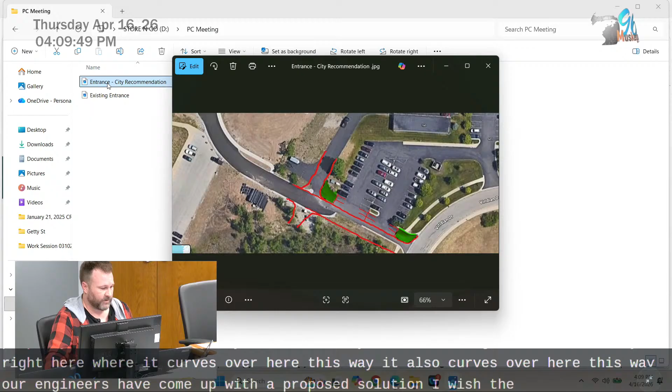Our engineers came up with a proposed solution, which the developer can speak on. We talked a little before the meeting — this was just a quick sketch showing how it could function better. They agreed to remove the parking spaces in this area, since they'd be dangerous for ingress and egress with 90-degree parking there. Since they're removing that, we could shift this road down to the south and bring these curbs down here as well. The parking lot owned by Parmenter would actually gain several parking spaces.

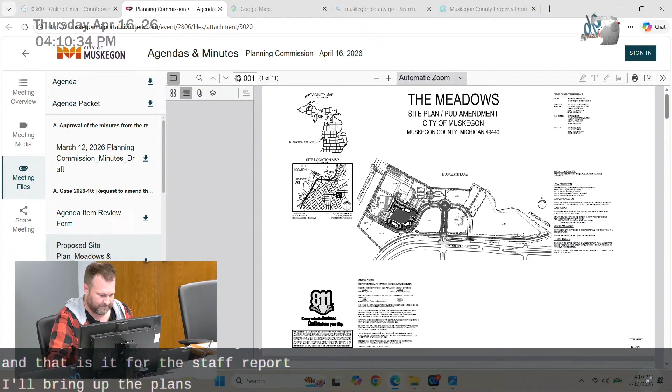That is it for the staff report. I'll bring up the plans. Right here is the existing parking lot at the GVSU building, which encroaches, and this is a potential redrawing of what that parking lot could look like.

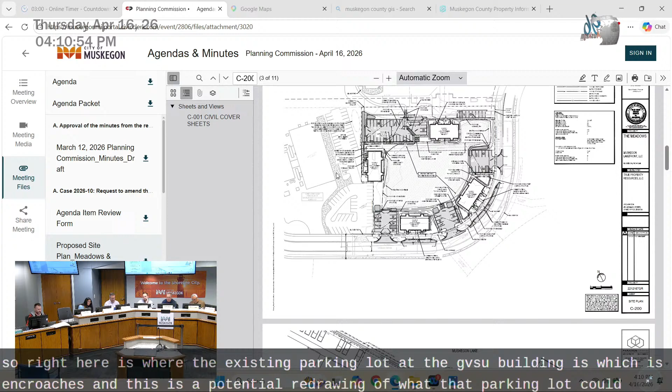Is that it, Mike? That's it. All right, any questions for us? A clarifying question, Mayor: I heard you said they agreed to remove those seven parking spots, and I noticed DPW did reference having an issue with that, as mentioned in the packet.

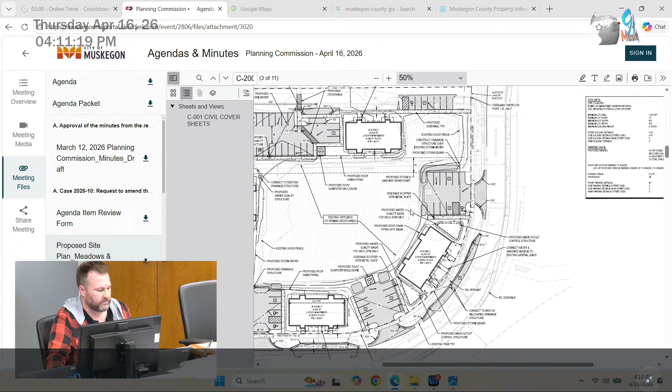There's one map that shows they're there, and another map that shows they're not there, and I don't see any language in a condition saying those are being removed. So I wanted to confirm that the PUD amendment being proposed and brought forward is not inclusive of those seven parking spots.

Correct — that should be another condition, that those are removed. You're talking about the GVSU ones? No, these here — the ones that would need to be removed to accommodate the straightening of that road.

And have we heard from the applicant? They did actually remove those — I had a new plan, I did not upload it yet, but it shows those removed. Okay, gotcha, and the applicant is here. But it still should be a condition, though, right? It still should be a condition, yes.

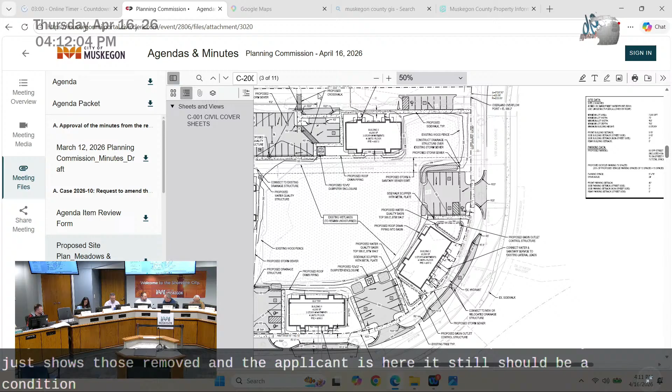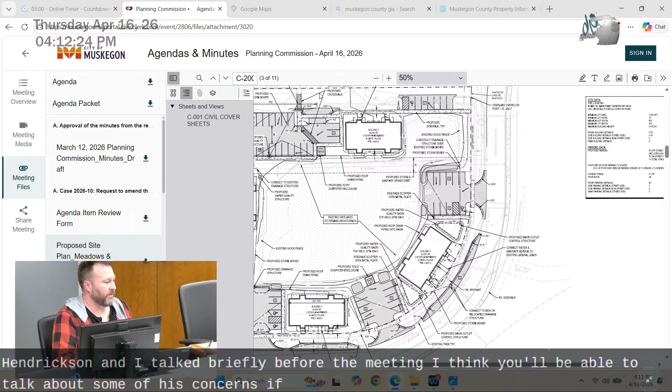Go ahead — I was just wondering what we've heard from the applicant regarding straightening the road. Are they amenable to that, do they like it or not? There's some issues since there's different ownership there, and Mr. Hendrickson and I talked briefly before the meeting; I think he'll be able to speak to some of his concerns. If we can't come to an agreement today on exactly what that looks like, we could either table it or approve with the condition that they sit down with staff and come to an agreement on how it could function better.

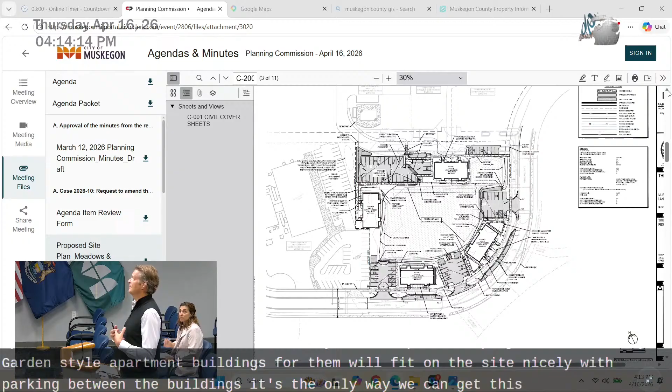This was really tricky to try to figure out how we can use this property here in the lot we now call Lot D, next to Grand Valley. So we came up with this concept of relatively narrow apartment projects, 3-story garden-style apartment buildings. Four of them will fit on the site nicely with parking between the buildings. It's the only way we could get this really to fit. What's really interesting is all these units will then face the wetland, which makes the wetland become an asset to the development.

So putting parking between the buildings, the point is I think it's a 40-foot setback from the road where parking needs to be. That's why we're here today primarily. The buildings do sit up against the road, which is good, that's form-based code, likes your buildings close to the road, so that's the good part. So it's really the parking itself, and we've talked about either putting landscaping there or something to buffer that hard edge of the parking.

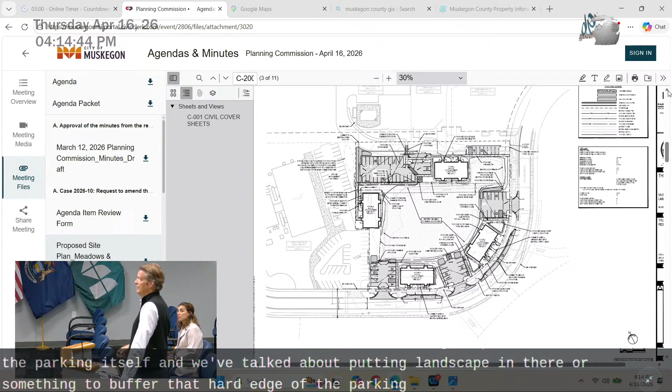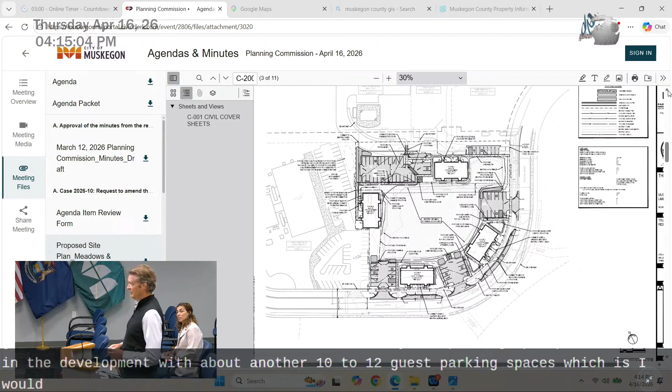We do have some, I think it's 8 off-street parking spaces we'd like to put off from Viridian Drive. That gives us enough parking ratio to have basically 1 parking spot per bedroom in the development, with about another 10 to 12 guest parking spaces, which I would consider probably a bare minimum. There is ability to have some parking on Viridian Drive. I think, Mike, maybe we can talk about that at some point. But because the road gets a little wide, kind of at the throat where we talked about this entry drive back to Viridian Drive, Viridian project, so we can do some off-street parking there if we needed to.

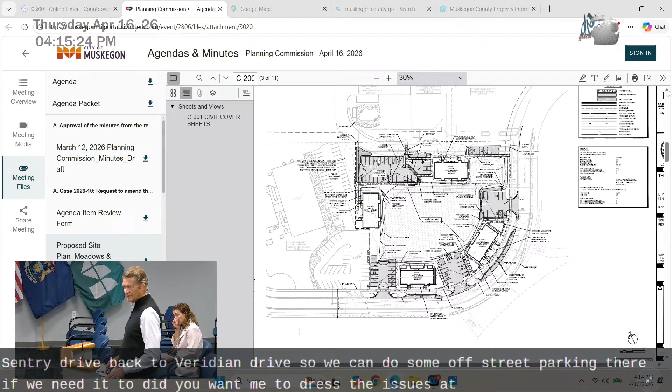Do you want me to address the road issue now, or do you want me to wait? Yeah, I think that would probably be good. Sounds like that's the biggest issue.

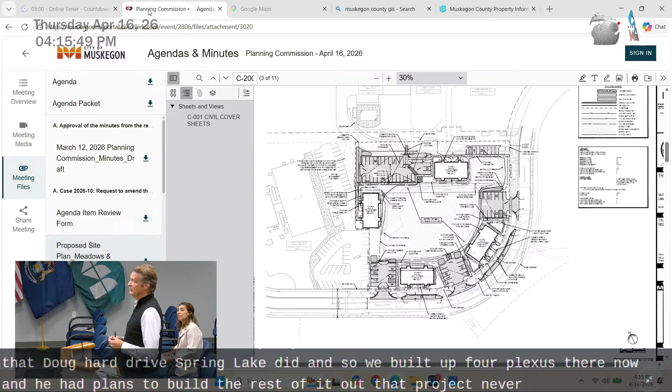I don't really have a cursor or pen, but the original intent, if everybody knows - I know Brian remembers this - Vita Nova was a development that Doug Hardredd of Spring Lake did, and so he built that fourplex that's there now, and he had plans to build the rest of it out. That project never really took off, so the fourplex was built, and that was it. There was a road that came in, and you can kind of see it where it says hydrant. That road came in, that was meant to be the drive that goes back to this parcel, what they call Parcel A.

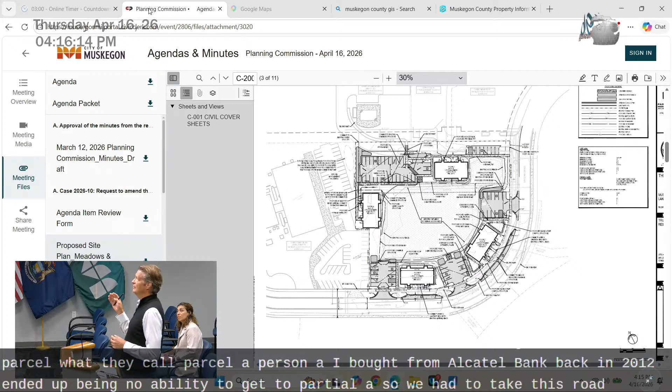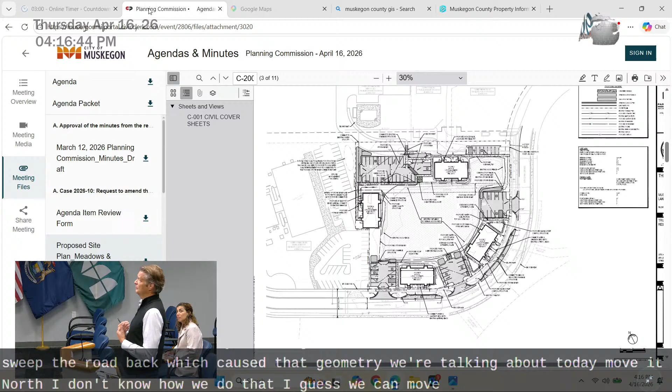Move it north, I don't know how we do that. I guess we can move the road, which is down south, but I'm not sure how that works. I know, Mike, you have a sketch - you could maybe pull up that sketch of what that would look like, and I've got an alternate solution for that.

What I'm proposing is we leave the curb cut off Viridian Drive just as it is and do a much better and graceful swoop down to the left, so it looks as if the driveway then kind of takes a quick left rather than a hard left. I think that'll solve the problem.

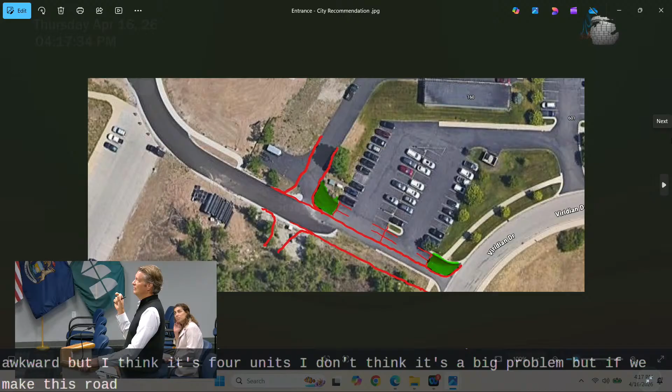Now, I realize the fourplex drive is a little awkward, but I think it's 4 units, so I don't think it's a big problem. But if we make this road look a little more intentional and a little more geometric, I think that will solve that problem. And I'm willing to do that.

I'm willing to take, so I don't know if you can mark up, Mike, where we talked about, just soften that edge. Right here. No, down, right. Yep, come on. Soften your edge like this, kind of come up there and just do it. Oh, right here. Yeah.

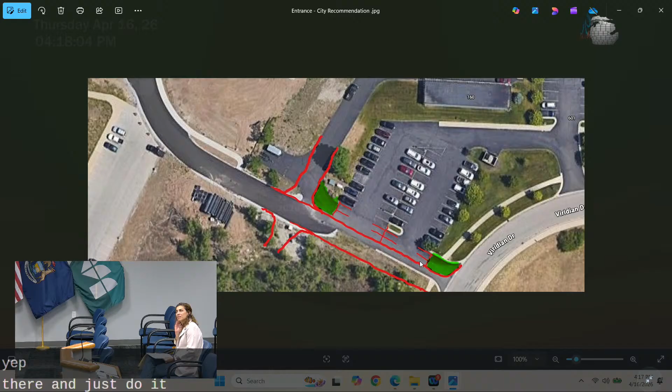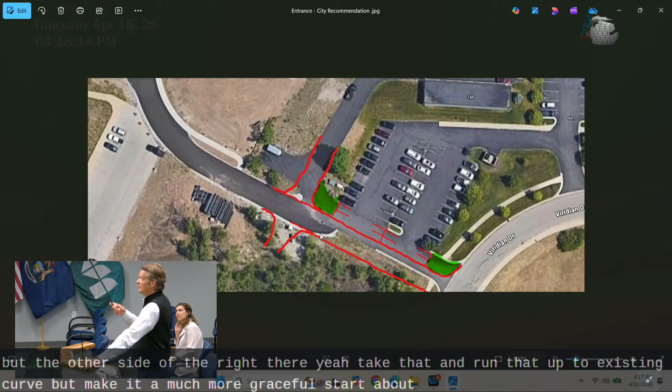So the other side of the road, right there, yeah, take that and run that up to existing curb, but make it much more graceful. Start about where you see the white line ending and then fill that in with asphalt. That'll make this road appear as if it's a road with a little curve to it, which is all fine, right? Curves and roads are pretty typical.

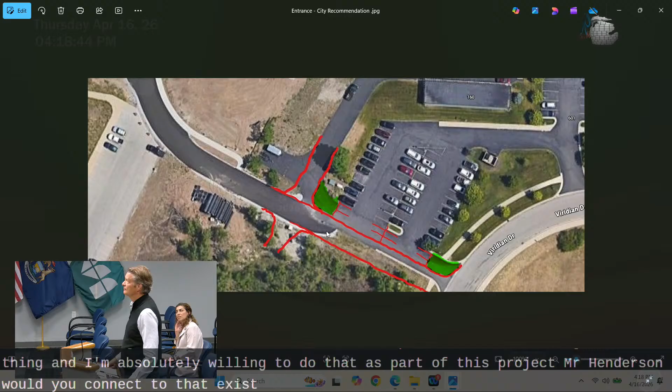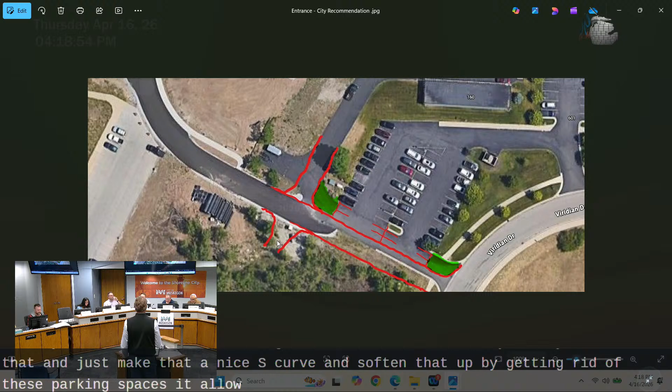Mr. Henderson, would you connect to that existing curb to the west then, or? Yes. Okay, so take that and just make that a nice S curve and soften that up. By getting rid of these parking spaces, it allows us to do that. And again, then the road comes in, takes just a little slight dip to the left and runs around.

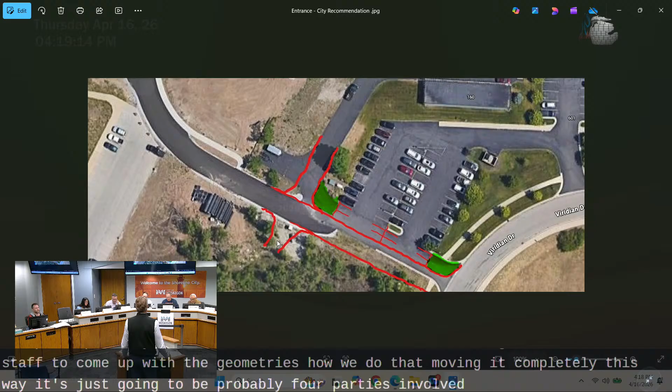I think we could stripe it possibly to make that more clear, and I'd be willing to work with staff to come up with the geometries, how we do that. Moving it completely this way, it's just going to be probably 4 parties involved, and I know how it's gone so far. So it feels like it's a difficult ask. This does the exact same thing.

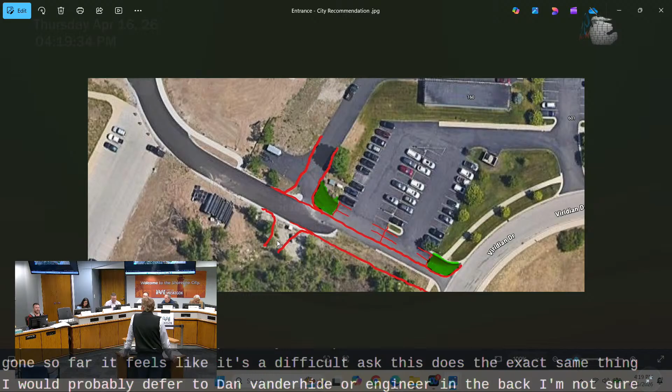Mike, do you have an opinion on that or a thought? I would probably defer to Dan Vanderheide, our engineer in the back. I'm not sure if Dan can get that, or I mean, we're kind of operating on the fly, and I don't know that that's the best. It may not be, but Dan may be amenable to a condition where we sit down.

Before we do that, Mayor, while he reflects on that and decides if he wants to weigh in at this point, can I just get some clarity?

Because you mentioned pulling it down could end up entailing 4 different property owners. Can you help me understand? Because if we did just straighten it out, as depicted right now, just straighten it out, you'd be giving up, and you already are committed to giving up those 7 parking spots where you see the little green area, green brownish area. So that'd be foregone and be now part of the proposed road according to this schematic.

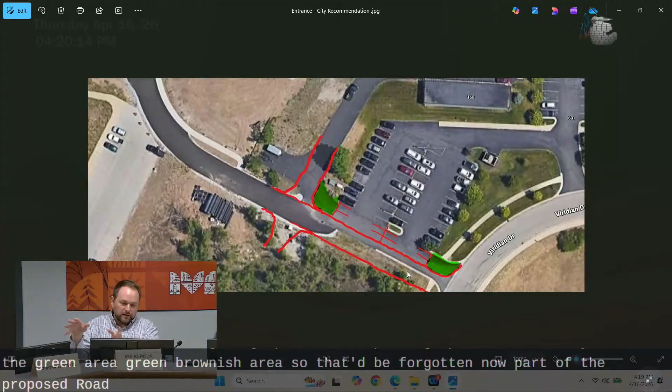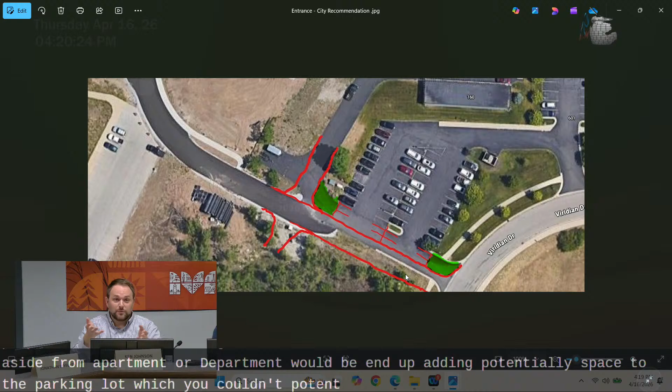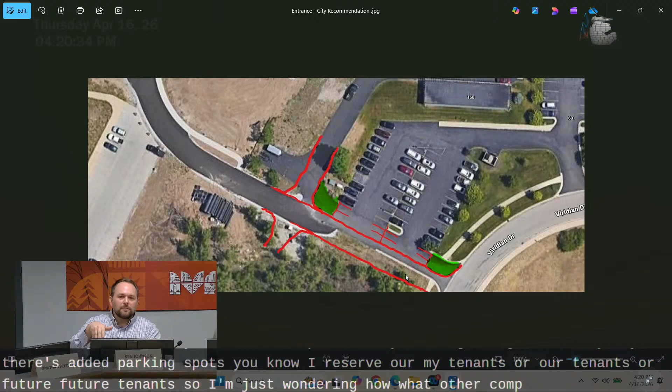How does that involve these others, aside from Parmenter, because Parmenter would end up adding potentially space to their parking lot, which you could end up working on an agreement saying those added parking spots are reserved for my tenants or our tenants or future tenants. So I'm just wondering what other complications or how is that otherwise problematic, and how would that help me better understand the concerns with potentially having 4 different property owners with straightening out that road, and what other concerns or problems do you foresee going that route? And I appreciate you saying the sloping is an improvement from what's there now.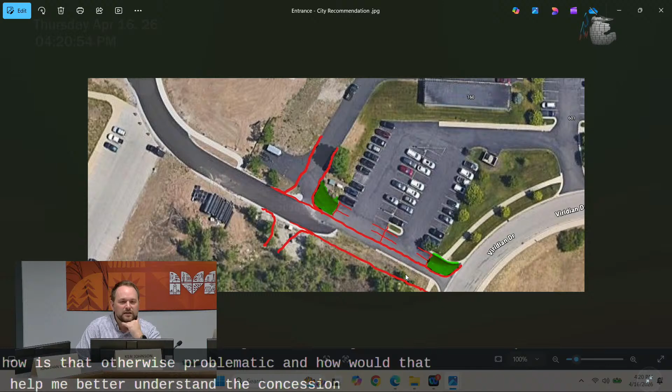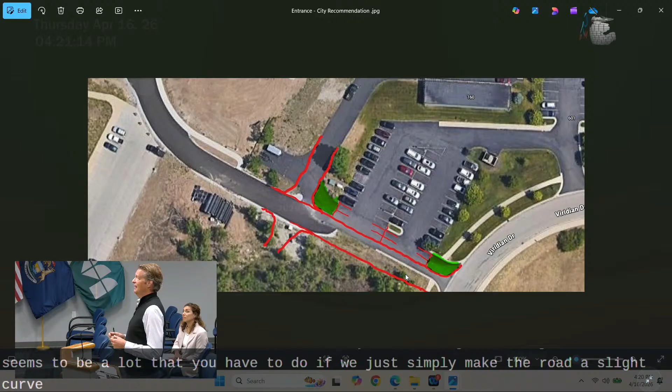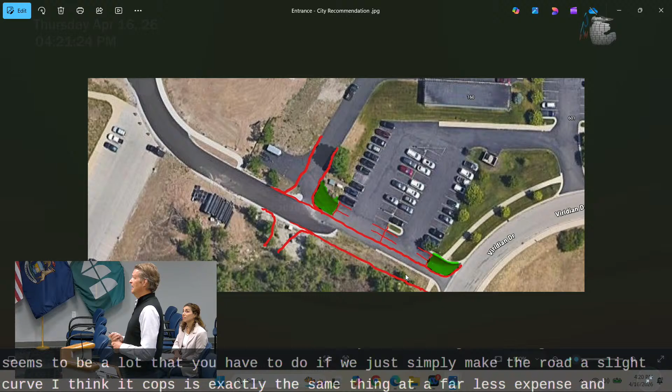So I'm not discounting that, but help me understand the concerns. Yeah, you could move that down. I mean, that ends up with a curb cut into a city-owned road, which is fine, we can work through that. Sidewalks, there seems to be a lot you have to do. If we simply make the road a slight curve, I think it accomplishes exactly the same thing at far less expense. The project needs to be feasible, and I think the curve does the same thing, if not a little better.

I've never really liked that little blip in there, and I'm not exactly sure why we created it that way anyway, so I have no problem doing it this way. I just think the amount of people that have to say yes to this increases to 4 or 5, and that becomes more and more difficult. We're going to try to move quickly with this, and I could see getting everybody to agree to agree being the thing that takes the most amount of time.

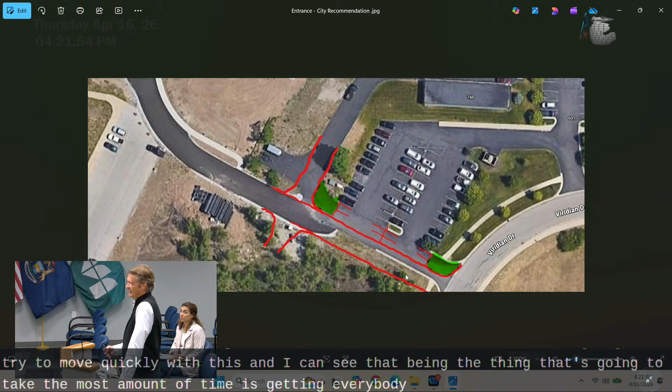I want to understand too. I guess I understand what the mayor's saying, but Mike, if we use the plan you're suggesting, one property owner gets some additional spaces, but that is a curb along there, right? So they would lose access to that access road, right? No, from that side—if you look at the cursor, are you talking about this line right here?

I believe that would remain open actually. Oh, that's not a curb. No, that's meant to be... Okay, that was just kind of drawn on the fly. Alright, so that's the change in intention, right? Yeah, there'd be a connection there. Either way, whether we leave the road right where it is now and make the turn we're talking about, or we do this, it's still open to Palmetto's lot.

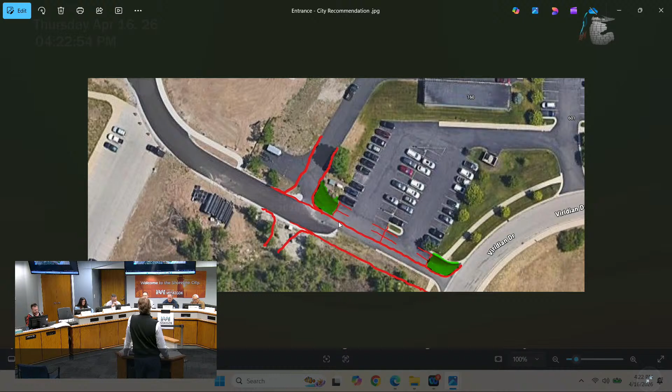Anything else you want to tell us, Mr. Hendrickson? I guess, in addition to this issue.

Regarding Grand Valley, I've been talking to them over the years. We've known this is coming for the last 2 or 3 years, so I've talked to Karen Engel. I know they bought the building this December, so perfect timing. She understands this—it took them a bit by surprise, trying to figure out who's going to pay for it, obviously, so that's probably the biggest hurdle. They understand the need to do this. They actually like the idea of putting the parking closer to the building because that grass area is kind of awkward, so I think we lost about 5 spaces by doing this.

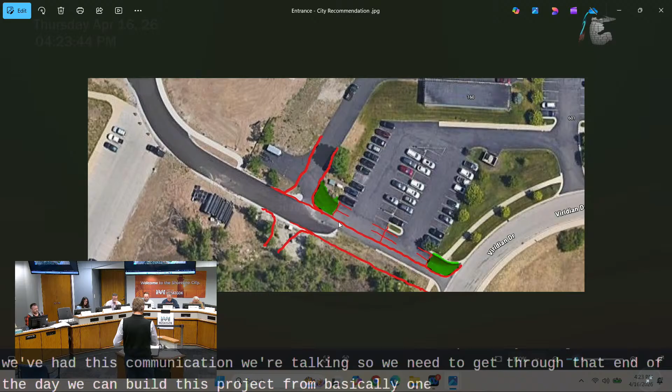We've had this communication, we're talking, so we just need to get through that. At the end of the day, we can build this project from basically 1 through 3, and it really only affects a little parking and 1 building. We can build the other 3 buildings without an agreement in place, so to speak.

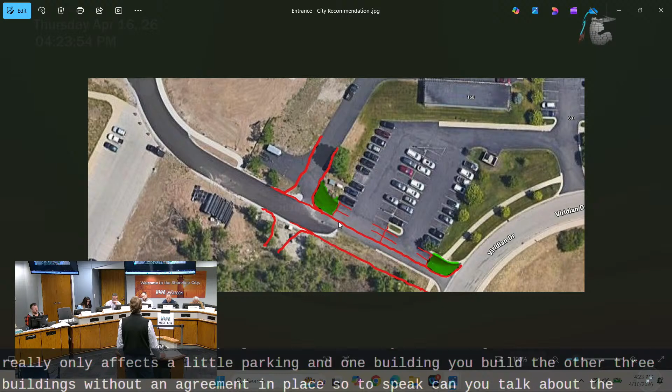Can you talk about the one issue that Mike brought up, which has also been brought to our attention by a public member—the access to the boardwalk? Can you talk about that? Sure can. Can we pull up a drawing? Is there an overall site plan? I don't remember what you have in the packet.

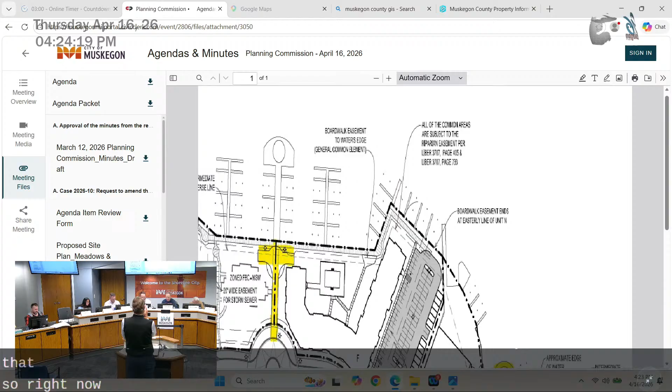Right now, the drive entry on Terrace comes into the circle. There is a sidewalk right now between Palmetto Tool and our lot that goes about 3/4 of the way to the boardwalk and stops. I want to say it's a 5-foot wide sidewalk. Our proposal is to make that a 10-foot wide sidewalk with a sort of gathering area at the end. We'd have to ramp up from the very end of it up to the boardwalk—I think it's about 20 feet of ramp.

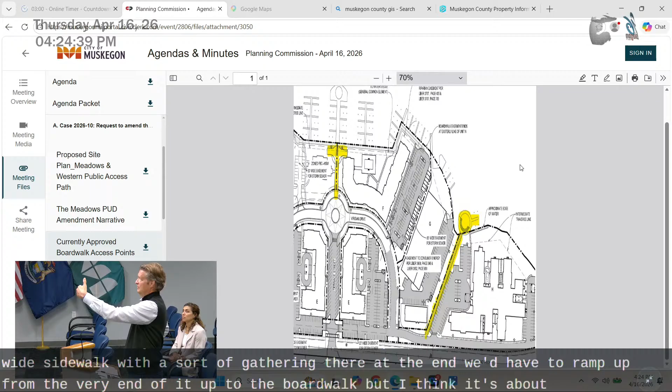To make that look intentional, be right on the center line of the drive coming in, and that would be the main public access. We'd sign that, put a sign out there. I think there's a sign right now at the entry of Harbor 31, but from there, there's no signage. That's been one of the beefs of people associated with the association, is that there's not good signage, and I agree. We can put a sign there to make sure that's public access number 1.

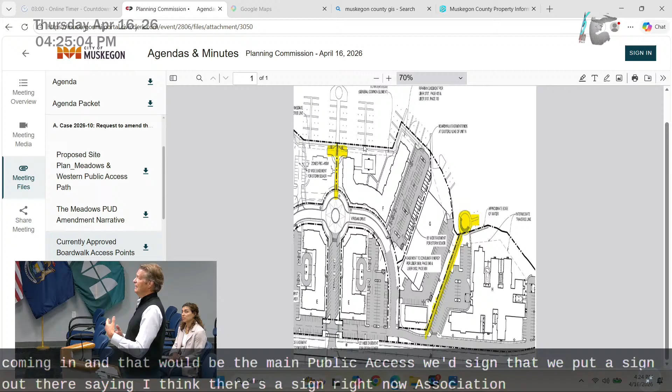There's also, that's in the center of the drawing? Okay, yes. Make that 10-foot wide, make it a little grander, a little more intentional. And then the other one would go through the development that's on I and N.

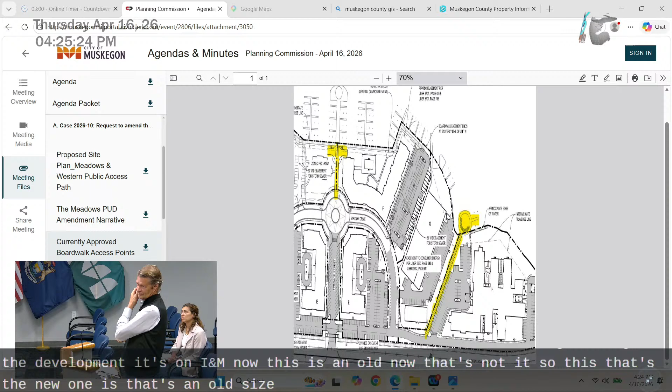Now, this is an old one, that's not it. So that's the new one, that's an old site. We had just used the other one for discussion, so I hadn't presented it. But I did want to mention to the board that this eastern path, it's not going to be able to go in as this.

If you've been down there, you can see there's also designated wetlands all through here. So they are working on a new proposal for a path. We've seen it, it's pretty good. But they want to work with their potential developer for this side of the development and see how that shapes up before they actually present the path. We've seen some mock-ups of it, and it seems like it would work very well. It would be very identifiable, especially with extra signage.

How important is that issue relative to the PUD amendment before us today? What we'd like to do is just leave it the same for this eastern development and have them come back and amend it when they're ready and a little further along for that one. The one we want to address is this center one, that's why I asked that.

We're committed to putting the center one in as part of the Meadows project. We're comfortable as a developer putting it in. The other one, we just don't know what the geometry is going to look like yet, and I hate to hold up this project. That could take a year. We don't know, so we don't have the luxury of a year. We can definitely put this one in.

I've already talked to Chris Kelly and his group. They're more than happy to give us a 5-foot easement onto their property. There's already a little bit of one there right now, so I've got that agreement with them. Who's that with? Chris Kelly, Palmetto Tool. So he's willing to do that. Okay.

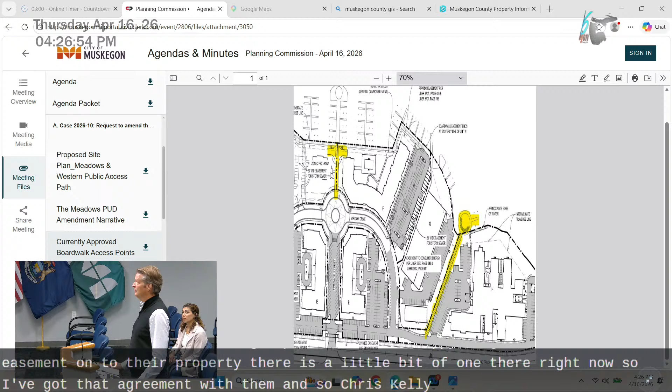We'll build that as part of this project. Is there anything else you want to tell us about that issue? Is there any other questions for Mr. Hendrickson? We good? Thank you.